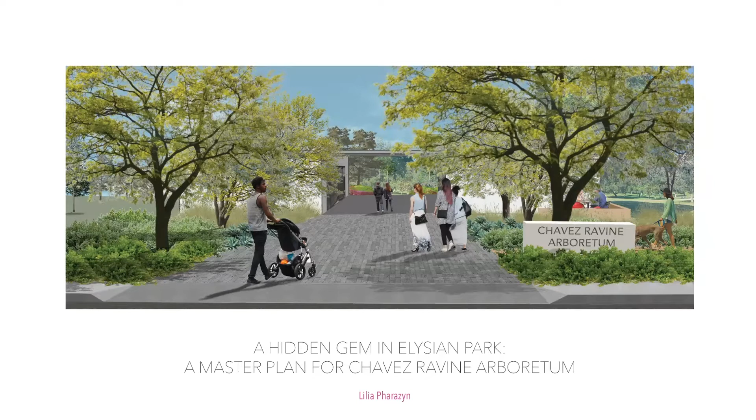Good morning, everybody. My name is Lilia Pharazyn, and my first time visiting the Chavez Ravine Arboretum was with an arboriculture class several years ago. I was surprised to learn about the history, and I had no idea this resource was right here in the middle of LA. The history of the site is unknown to many, and I hope to share with you the beauty and potential of this place to finally grow into the landmark it was meant to be.

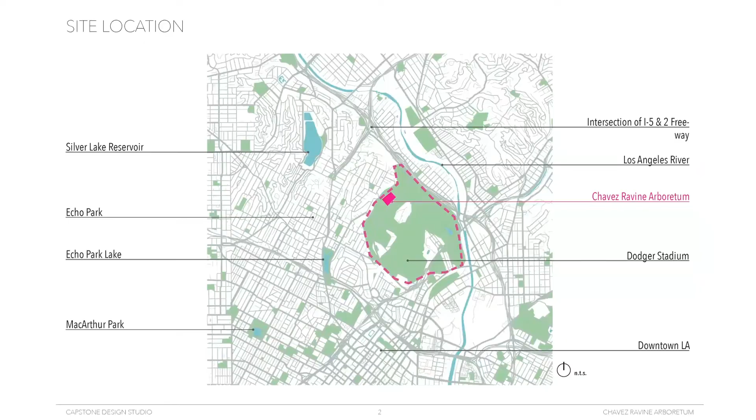The Chavez Ravine Arboretum is located within the 575-acre Elysian Park, the second largest park in the city, near downtown and the LA River. This land was home to the Tongva. In the mid-1800s, quarries were operated here, and it was known as Quarry Hill.

In 1886, Elysian Park was founded, and several years later a group of horticulturalists petitioned to start the Arboretum. It was created in 1893 in a haphazard fashion.

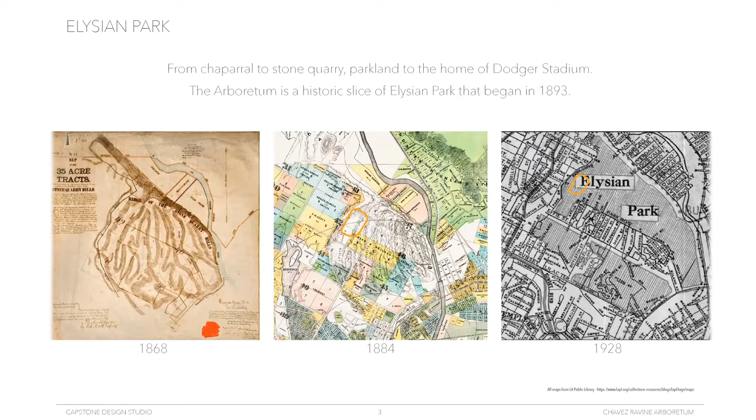The Arboretum is located in Chavez Ravine, the little valley named for one of LA County's first supervisors, Julian Chavez. The name also belongs to the community located south of the Arboretum that was destroyed by the government's use of eminent domain to acquire land for Dodger Stadium.

Today, if you go to the Arboretum, you have no clues that you are in Southern California's oldest botanic garden.

There are several reasons this site is worthy of a capstone project. It is a historic site, 127 years old, and in 1967 it was designated a city landmark.

There was also a master plan for Elysian Park completed in 2006 that specified the need for a retrofitted master plan. When you look at a lot of the other botanical gardens in the Los Angeles area, they are not in the urban core and cost money to enter. There is an unpretentiousness and openness about the Arboretum that makes it unique within the landscape of botanic gardens.

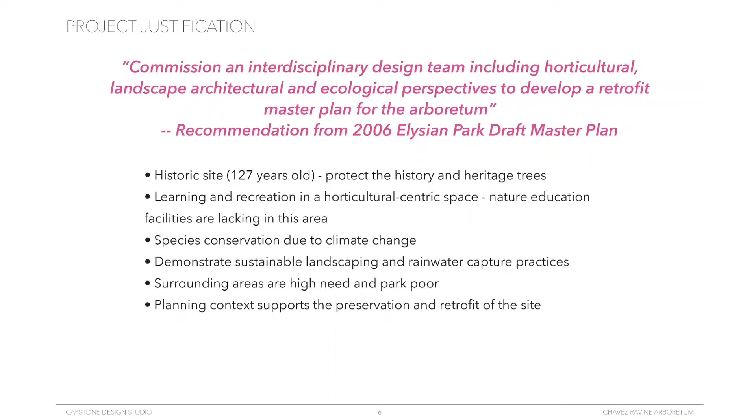This project will develop a landscape master plan for the site. There's never been any formal planning of the Arboretum. The design will cover 14 acres and provide leisure and recreation opportunities for all users.

The users of this site include many different people, from families to senior groups, youth groups, and landscape professionals. The park is surrounded by mostly residential areas, and there are multiple schools within a 1-mile radius of the site.

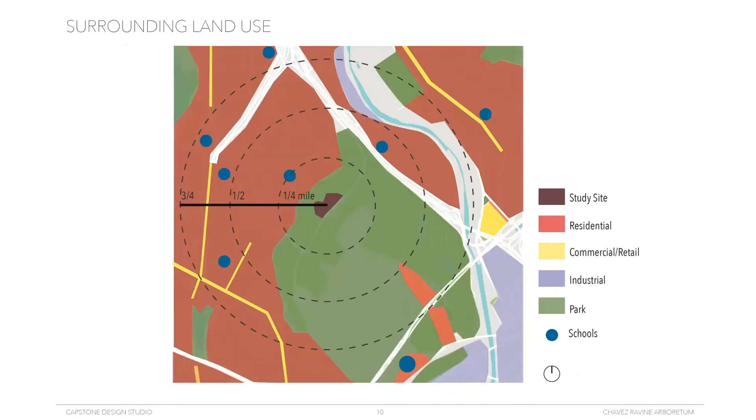The existing program in the park includes active and passive recreation, such as baseball diamonds and picnic areas. Other uses within the geography of the park, but not owned by Rec and Parks, include the Police Academy, Barlow Respiratory Hospital, and Dodger Stadium, all of which draw users from throughout Southern California.

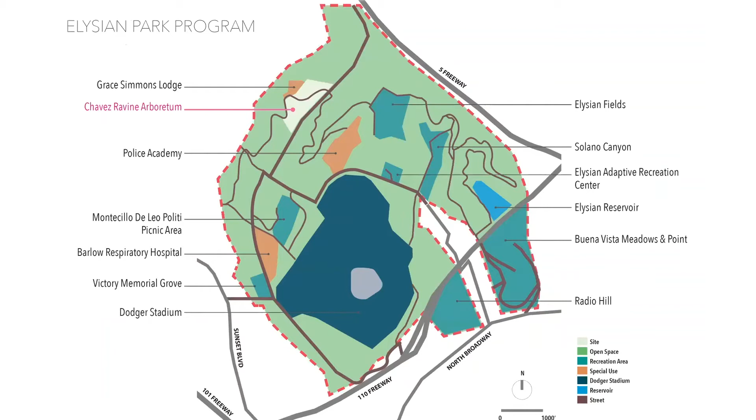I compiled a tree inventory for the site using a recently updated city dataset. There are 3 categories of trees designated by the city. I also met on site with individuals who have a wealth of experience with the site, and they provided insightful details.

In order to meet my goal of telling the history of the site, I kept all historic and heritage trees and almost all of the trees labeled no designation.

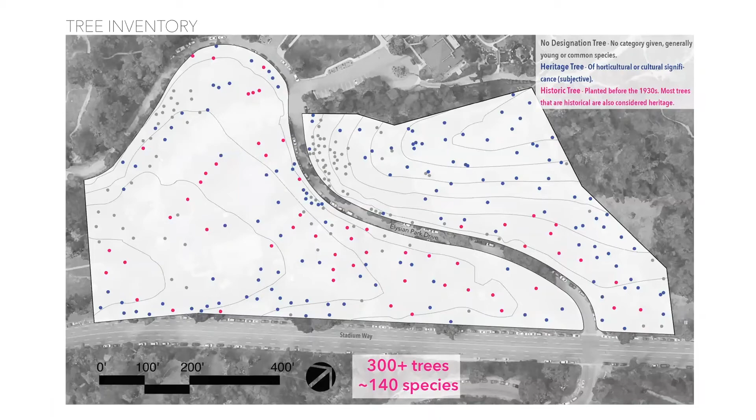In 1956, Theodore Payne wrote an article about the site saying, 'It would be well worthwhile for any lover of plants to visit this site and see the interesting as well as botanically historical collection of fine specimen trees.' 64 years later, this still remains true.

The founding horticulturalists were not designing the space in any way, so there is limited organization of the trees. However, I was able to find some themes that tell a story.

For example, the area called the California Experiment was based on the story that the founding members used seeds collected from their trips around the world to create this garden of experimentation to see what would grow and adapt to our Southern California climate. Many trees in our region come from these parent trees planted here.

Another area that I'm calling the World of Oaks was derived from the variety of East Coast oaks that were planted here, like the white oak and bur oak, and as the years passed, European and Californian varieties were also introduced. Creating this programming gives a narrative to the site and also helps guide locations for succession planting.

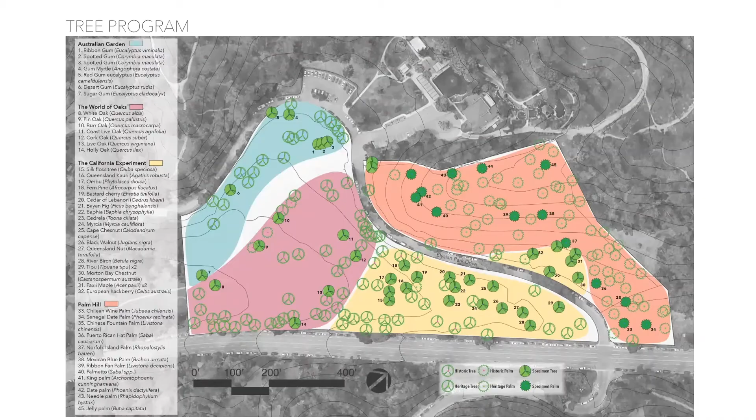There is one way into the Arboretum via Stadium Way. Most users arrive by car because there's no bus line that runs on Stadium Way. Within the site, there's a lack of formal walking paths or sidewalks, which means there is no guidance for visitors on where to go.

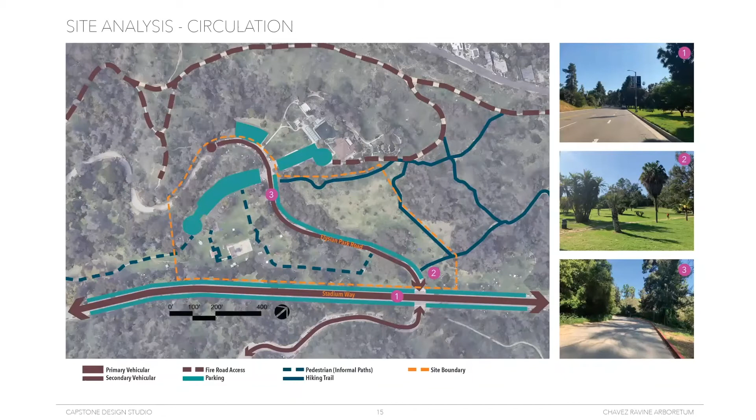There are several picnic areas and a playground structure. In the northern portion of the site is Palm Hill, an area planted with a variety of palm species in the 1970s, although there is no signage or indicators that this is the program of the area. Outside of the boundary is the Grace Simmons Lodge, a venue rented for events, and the natural park landscape that is a mix of chaparral and invasive species.

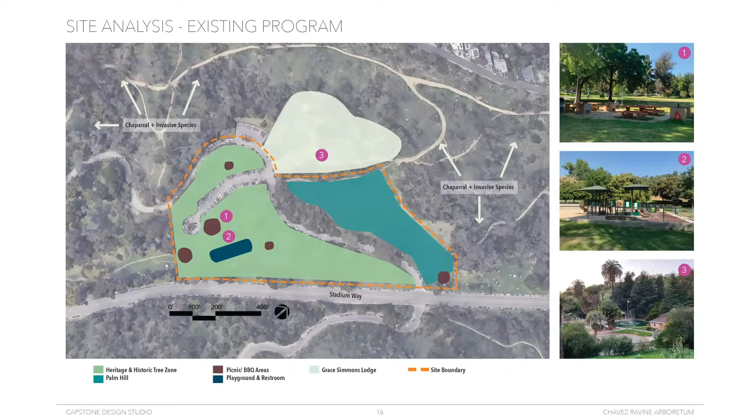The topography of the site includes some very steep inclines and a ravine that has a gentle slope down the center towards the southern part of the site. This swale line could be an opportunity to connect the site to the adjacent parkland along the southern edge.

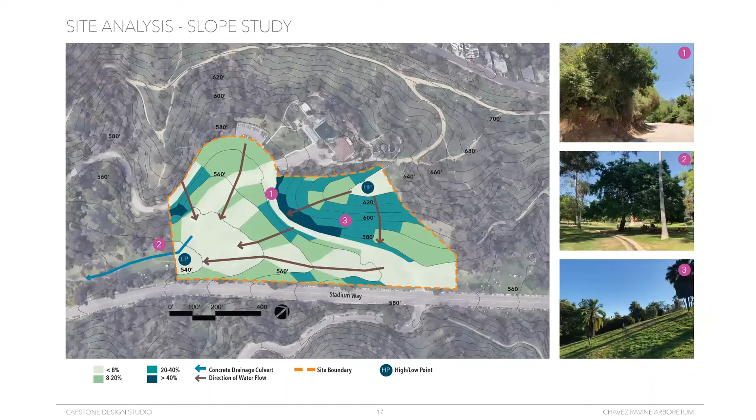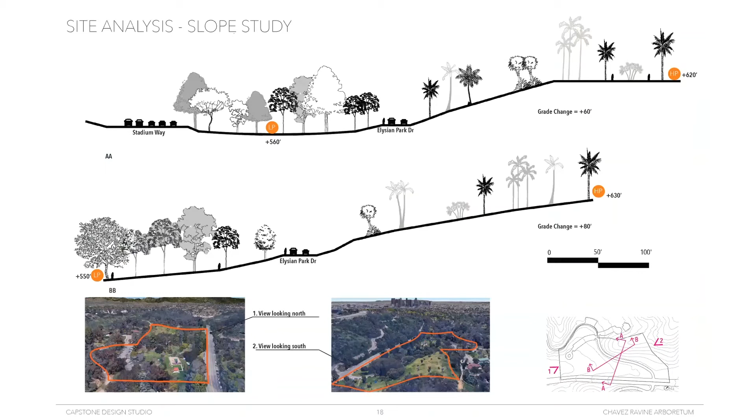These sections through the site help me study the scale in relation to the slope and existing trees. This diagram shows different areas to take advantage of in my concept design, such as the great view to downtown LA from the top of Palm Hill, or the large sunny open area that has no existing trees and could be a good place to site a building, a plant nursery, or event lawn.

Some of the challenges are creating accessible pathways on the steep terrain, and Elysian Park Drive, which divides the site into two segments.

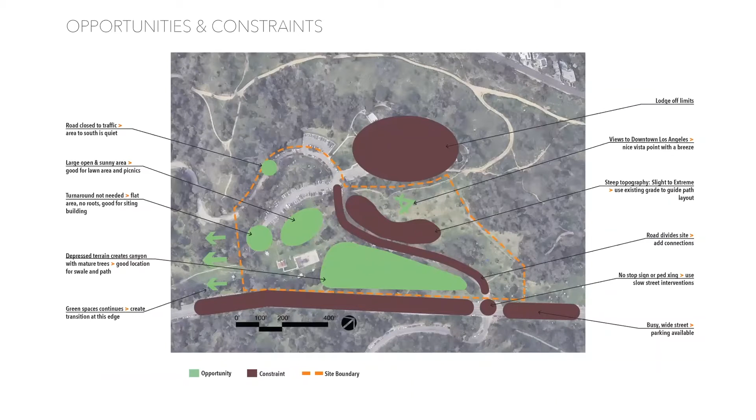Prior to delving into the concept design, I looked in depth at several sites: the LA Natural History Museum Garden, the McIntire Botanical Garden, and the Learning Campus at the Chicago Botanic Gardens. I looked into each site's mission, programming, and key design features that tell the stories of the site. I also reviewed regional botanic gardens to look for successful program elements.

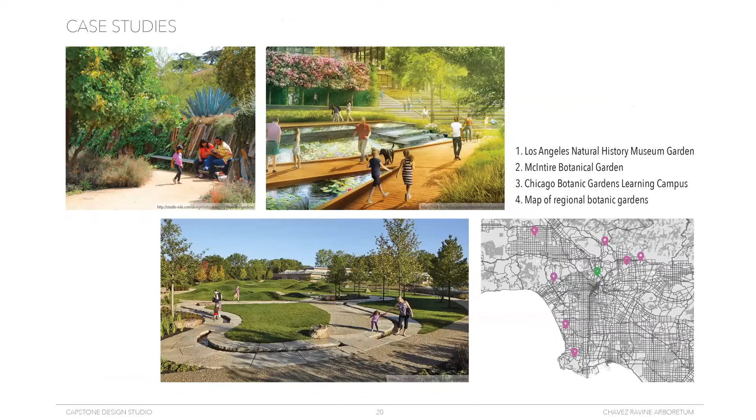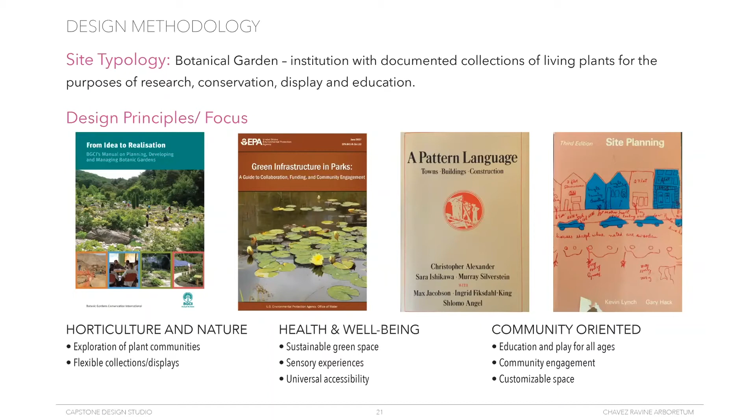The focus of my design research splits into three areas: creating places focused on nature and horticulture, health and well-being, and community-oriented places. I reference guidelines for botanical garden design, designing inclusive spaces, how to incorporate green infrastructure, and principles of site design. The program focuses on four areas.

The principal one is the Living Museum, consisting of the tree exhibit areas. Education, leisure, and site amenities include elements such as a visitor center, plant nursery, outdoor classroom, nature play spaces, and a grand lawn. I've also included space for a small cafe since there is limited food amenities in the park.

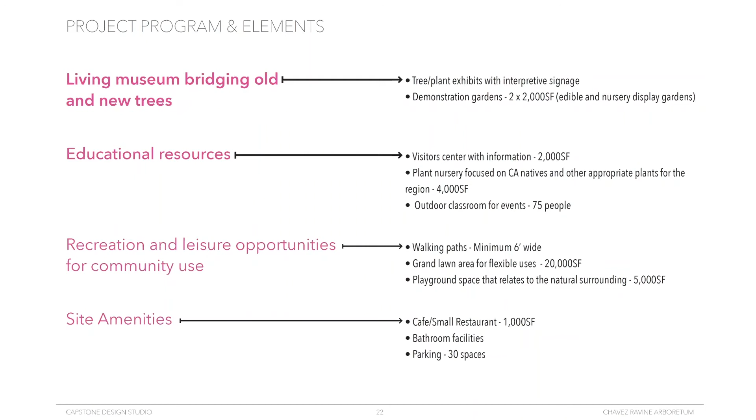My design metaphor is lungs, the organ responsible for a process called respiration, where there is an exchange of gas that oxygenates our bloodstream. We have two lungs, the right and left, and there are five lobes. The site form is reminiscent of lungs, and we have five main tree programs that carry us through the site.

Visitors that come to the Arboretum will exchange experiences and knowledge. Respiration comes from the Latin respirare, which means to take a breath, but also to enjoy a respite. I'll create spaces to enjoy a respite and take in a breath amongst these historic trees.

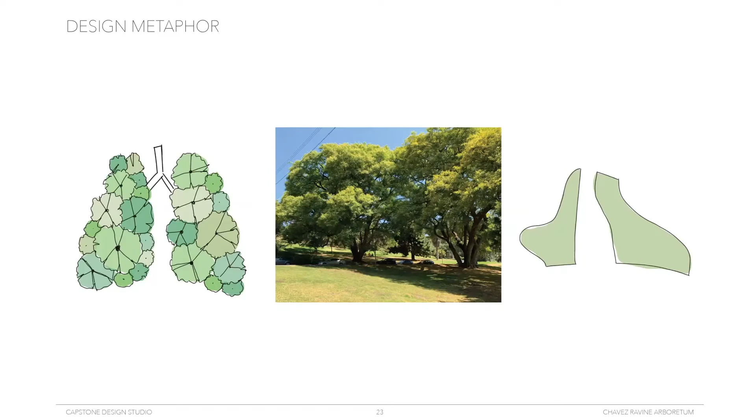So onto my site plan. Visitors enter the site and park at number 1. The parking lot has been reduced by half and the turnaround was removed. Based off the site analysis and the existing elements that cannot move, this was the most appropriate location for parking.

However, given the availability of street parking and other potential locations for parking shown at number 12, reducing this lot that was dividing this part of the site was a way to unify it, and also provided a location for the visitor center. Given the amount of trees and tree roots, I was looking to site the building where there would be minimal impact.

This core of the site at 2 and 3 includes the visitor center with a cafe and an outdoor classroom. The visitor center will house information on the history of the site and educate the users on the history of Chavez Ravine.

There are several picnic areas on the site denoted by 4s, and the grand lawn at 7 is a flexible space to catch some sun.

At 6 is the plant nursery and a greenhouse. Visitors who come and just want to buy a few plants can park and get to the nursery along the secondary pathway. I will be going into further detail of the other site elements in the enlargements.

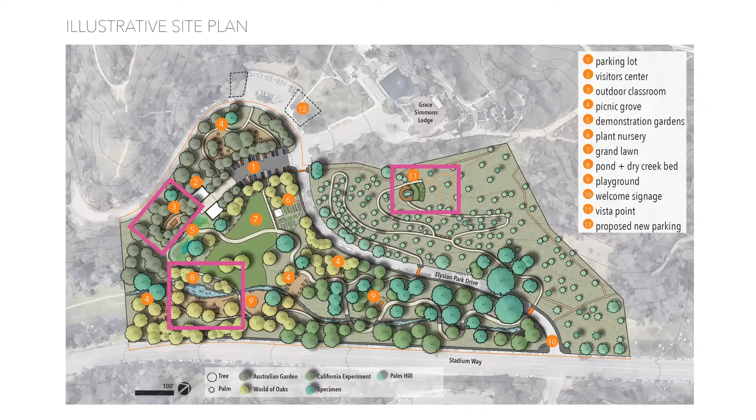This diagram gives us a clearer view of the circulation system and the road treatment for Elysian Park Drive. I have added a sidewalk along the streets, bulb-outs at crossings, and speed mounds for safety. Different materials signal to users the different zones.

The main walkway to the visitor center is a permeable paver, number 1, that then transitions to a warm tan concrete, number 2. Once visitors enter the California experiment at 3, there is a transition to a boardwalk path that will minimize impact to the tree roots. Palm Hill has decomposed granite pathways, which adds an informality, provides permeability, and helps with the heat on the south-facing slope.

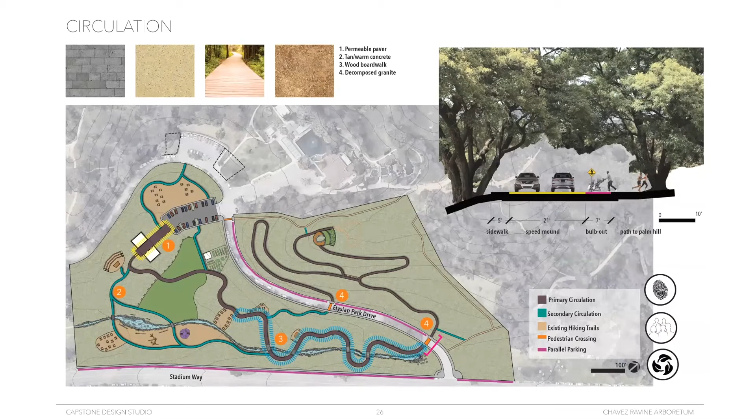Here we can see how water flows on the site and how it can be kept on site through a system of water catchment in runnels covered with a metal grate, stones, or wood like in the middle picture. The Grand Lawn makes for a perfect location to bury underground cisterns because there are no existing trees here.

While the swale is a dry creek for most of its extent, at its widest area there's a small pond that will serve as an interactive play component and provides wildlife a water source. The dry creek is a swale feature for water absorption and also references the potential underground streams that run in this area.

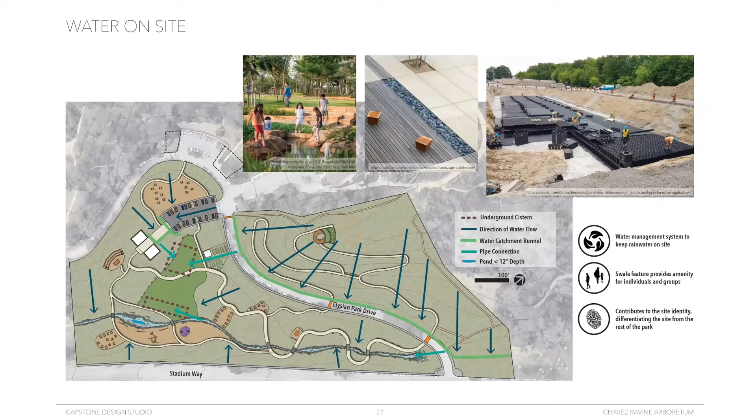In addition to the tree program, there are 8 curated gardens that represent the Mediterranean planting zones. For example, at the base of Palm Hill, there is an aloe and protea garden. As we move up the hill and gain sun exposure, the gardens feature more dry-loving plants from Chile, Canary Islands, Mexico, and Central America.

There are 6 crossings over the swale, providing opportunities for visitors to see the dry creek from different angles. On Palm Hill, there are metal arches along the path that support vines and provide shade to those traversing up the hill.

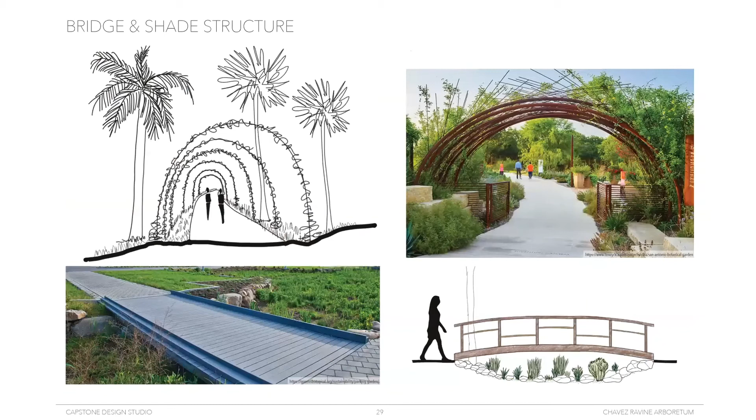Being an arboretum, signage, both for identifying plants and for wayfinding, is an important part of the site. There are opportunities to engage multiple sensibilities through tactile signs, interactive displays, signage placed at multiple height levels and in multiple languages. Proposed signage for the entrance at Stadium Way and Elysian Park Drive uses a large boulder to reference the history of the park as a quarry.

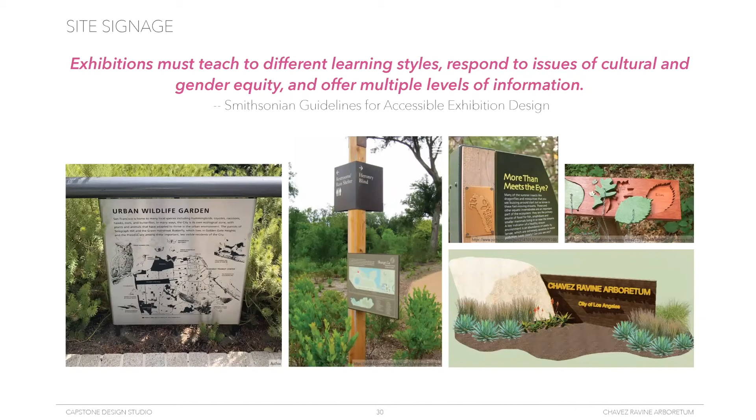I'll now go over some site enlargements. Once you traverse up the path to the top of the hill, you're greeted with a nice breeze and a view of downtown LA. There are 2 terraces of grass.

The upper terrace has shade sails. The wood deck built around the existing cluster of palm trees offers a place to take in the view or have a seat. You can also walk through the cactus garden before descending down the hill.

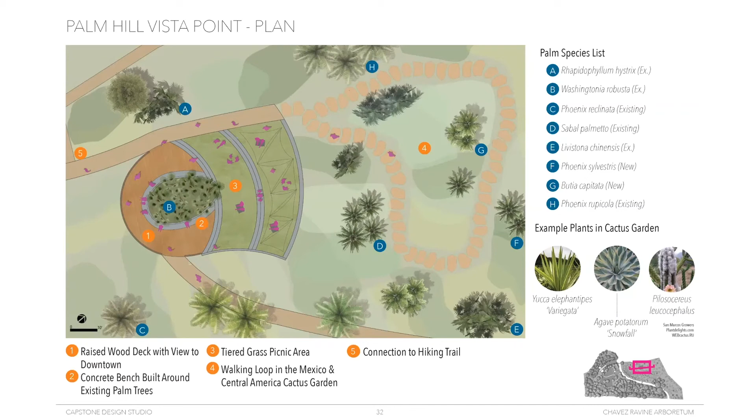Here we see how the terracing will work and how the cantilever deck will provide a different vantage point for visitors. I was inspired by late afternoon site visits where I saw people sitting with friends enjoying the view in the last few hours of light.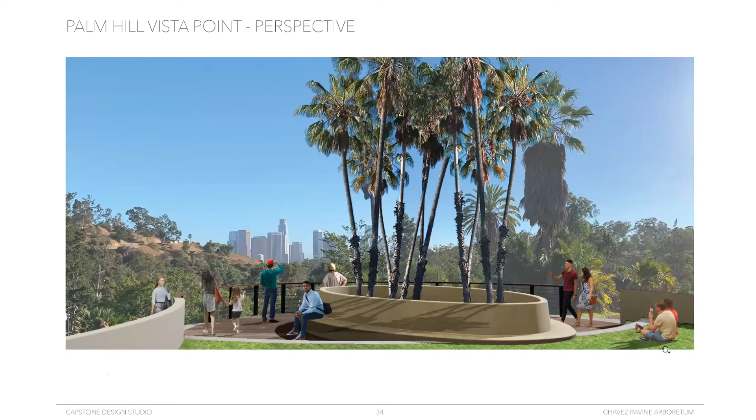Next up is the Dry Creek play area. This area features new play spaces along the Dry Creek with nature play features. Kids can explore the swale while parents grab a seat on a shaded bench nearby.

This part of the swale has a shallow pond feature where kids can poke around in the water and birds and insects can take a drink. At number 4 is the picnic grove with tables shaded by some new Quercus cambyi, Mexican red oaks.

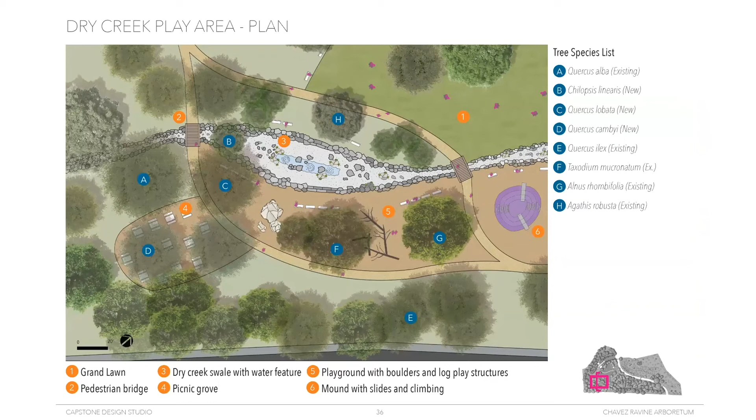This section shows the gentle sloping of the swale, providing a calm place to explore. This is one of the programmed areas closest to Stadium Way, yet the existing trees and the slope up to the street protect it from the road.

I studied putting a hedge or fence along this edge, but there is an element of safety that is lost when you close in the site.

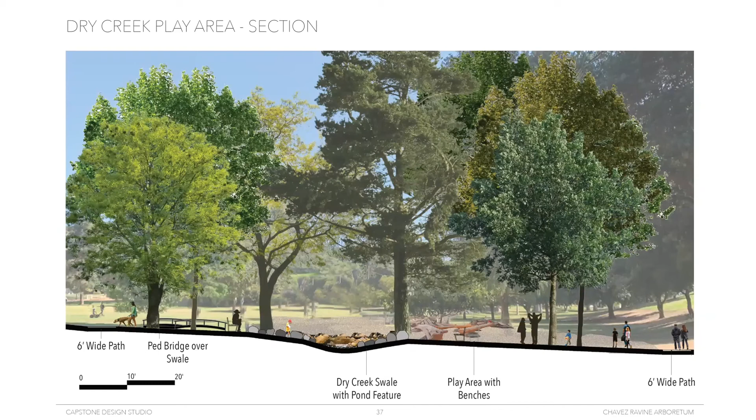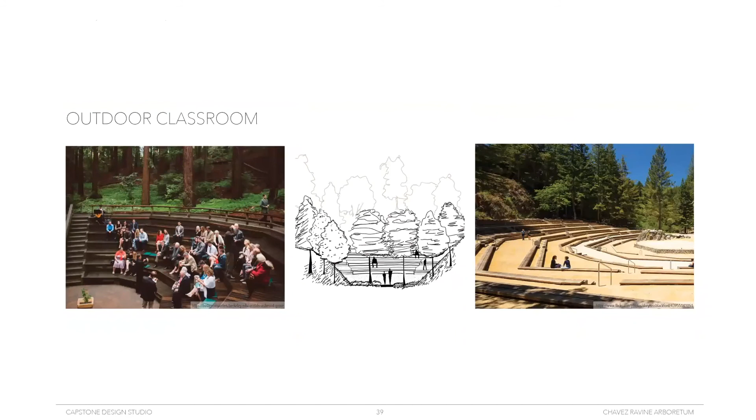Up next, we have the outdoor classroom. The outdoor classroom is a space where the Arboretum can host lectures and small events. You can sit amongst the trees in the fresh air and learn about arboriculture, maybe a class on proper pruning or new pest management techniques.

This section provides a sense of scale of the space. My objective was to create an outdoor learning venue that could accommodate 60 to 70 people. It's one of the quieter areas of the site, given that the road behind it is closed to through traffic.

The proximity to visitors to the visitor center and parking lot makes it accessible to visitors coming for just an event. The stage has a screening wall which provides the potential to show presentations or evening movies.

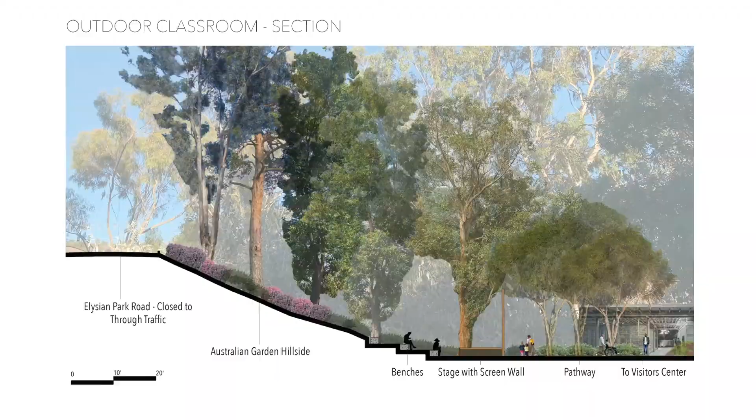This area boasts the majority of the oldest trees on site. The recommended pathway uses the example from Shangri-La Botanic Garden, where they built a wooden boardwalk pathway using helical piers and a modular structure to minimize impact to the existing tree roots.

This space is dedicated to walking amongst the trees with some benches along the way to sit and take in the space.

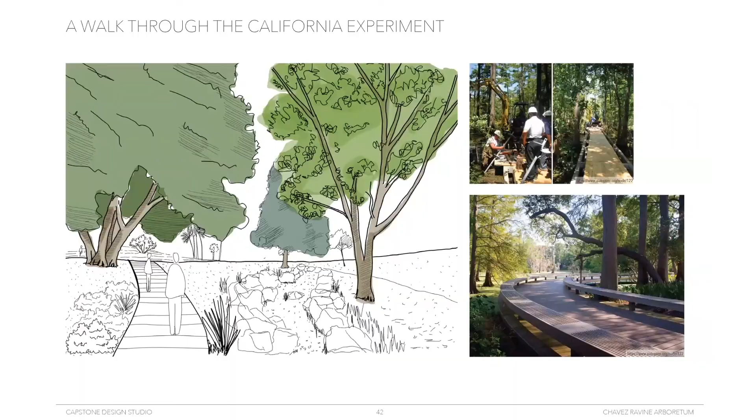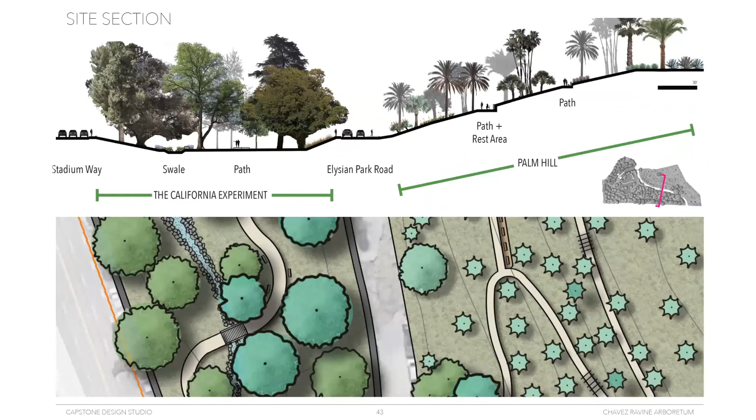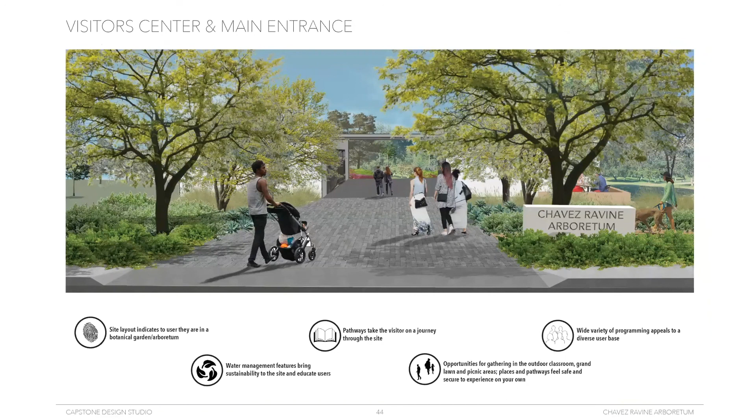On the right is a cafe where you can pick up a drink or bite to eat and take it with you on your exploration of the site. Or maybe you just want to walk straight through and begin your journey through this historic site and learn about the trees amongst us. Thank you.